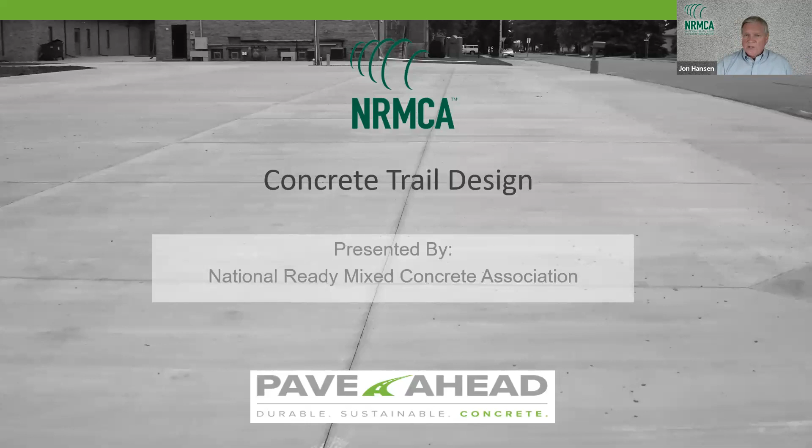As Jim mentioned, I cover parts of the southwestern United States now for our Pave Ahead team. I'm not working currently in the Midwest, even though I'm still living here. But I asked for and got the southwestern part of the United States and California a couple of years back because I was developing such good relationships through the years with contractors and producers in that area.

I looked at this today as I got it ready, and I thought, 48 years in the construction industry, my goodness. I'm almost ashamed to put that up there anymore, but as you can tell, that's a lifetime commitment to the concrete construction industry and construction in general.

16 of those years now have been with the National Ready Mix Concrete Association, on what was first the National Resource Directors team, and now we've divided it into paving and buildings, and I'm part of that paving team. I'm happy to tell you, just as an FYI, it was my idea to bring that Guide to Concrete Overlays of Asphalt Parking Lots to the industry.

This was a culmination of many conversations with another Illinoisan that you all know, Randy Riley, and sharing information back and forth on doing overlays of asphalt parking lots, along with Gordon Smith. These guys are really the pioneers in that. We brought that to market in 2012, and we're in the process of bringing out an updated version in September this year.

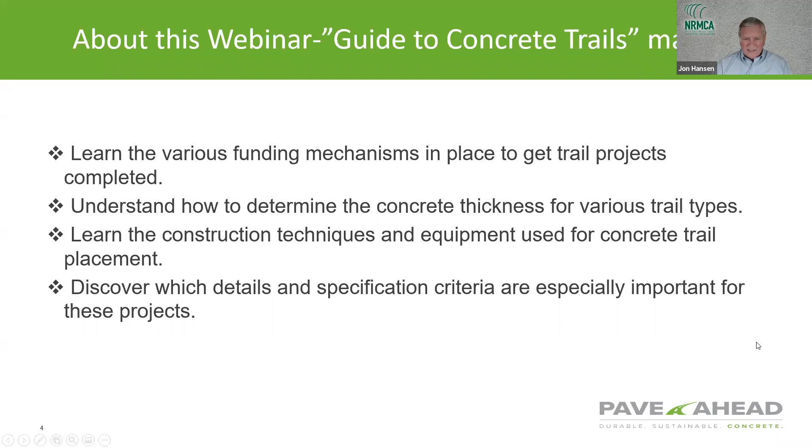And then we're going to look at which details and specification criteria are especially important for these projects. And when you get done with this, I hope you say like I do, boy, it's really quite simple. We don't try and complicate this. The design and the construction are really quite simple.

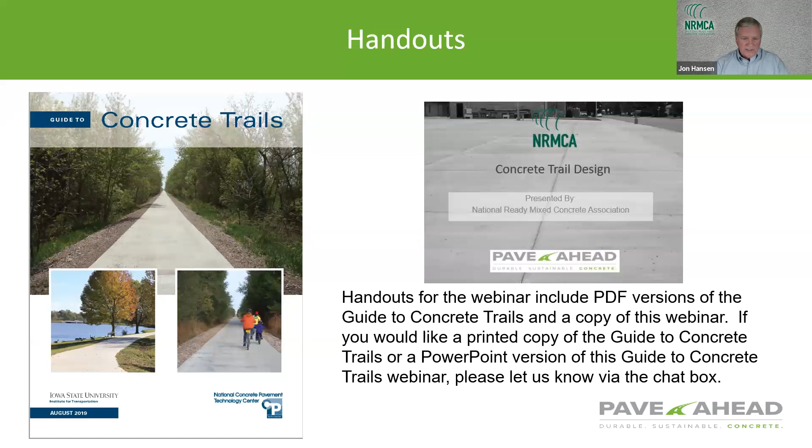And then, of course, if you've got some questions, type them into that chat box as we move forward. I do want to tell you that the Guide to Concrete Trails was produced by the National Concrete Pavement Technology Center. For those of you not familiar with the National CP Tech Center, it is a concrete paving research center based at Iowa State University.

I don't want you to get hung up on Iowa State University. I get people all over the country say, well, that's that Iowa document. No, that is the National Concrete Pavement Technology document. Much like the concrete industry has their National Research Center based at Iowa State University, which there were other universities in the running for when it was designated. I was part of the Iowa group that monitored that. The asphalt industry has their National Research Center at Auburn University. So we don't need to get hung up on it being a Midwest document. It is an industry document.

The reason we went to the CP Tech Center to write this document is that they are the recognized industry experts in all types of slab-on-grade paving. And of course, if you're going to have something written for the industry, why would you not go to the recognized resource? This was a collaborative effort.

The funding for this came from the Ready Mix Concrete Research and Education Foundation. So if any of you are here today and you contribute to the RMC Foundation, this is where your money's going. This is what it's being used to do.

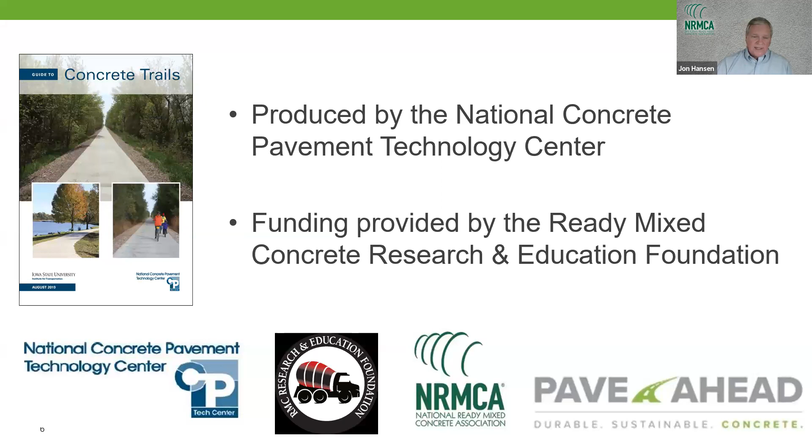And the goal of putting this together and bringing it to market was to deliver it at no cost. That is why you can download PDFs free, and why we sell the printed books at cost, at printing cost. This is not an effort to raise money selling books. It's an effort to bring information to the industry.

So why did we develop this Guide to Concrete Trails? Well, it comes down to this: we did some research and there was no standardized design and construction document that addressed concrete trail construction.

Now, we found three really good documents on asphalt trail construction, and they would put a sidebar in there, not specifically written by the asphalt industry but by other trail designers, saying concrete can be used for trail construction, talking about the thicknesses that had to be used, and they would mimic road design specifications and rebar. They were basically that same obstacle we run across all the time when someone else writes our information for us. They over design it.

And so we decided we needed an industry document that addressed the right practice of moving forward in building concrete hard surface recreational trails.

Now, what's happened in the last 20 to 30 years, and Jim mentioned the Des Moines area, it's assumed almost that when someone has a development, there will be an access trail of some kind within these developments. They have become a public utility that people expect within a community.

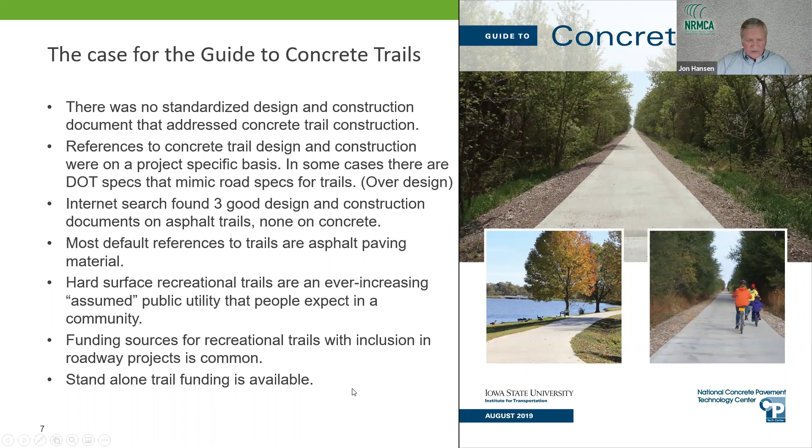You have to really decide what type of trail you're going to build and develop as you move forward. Right now, I'm in the process of working with a county that has 34 miles of developed trail. They are compacted limestone trails, and we're working on hard surfacing those, and of course we're talking about doing those in concrete. So we need to understand the terminology: recreational trails, hard surface recreational trails, concrete versus asphalt.

Let's just touch briefly on one slide here on funding that goes all the way back to 1956, the Federal Highway Act and the Highway Trust Fund, which had trails within that program. '68 National Trails, '76 the Rails to Trails grant program, we started to see the demise of some of the rural railroads. The Staggers Act, the ISTEA Act, '98, TEA-21, surface transportation block grants.

You need to explore all types of trail resources as you plan. And oftentimes, I'm going to touch on this in the next slide, trail ideas are moved forward by special interest groups within a community. We do find more designers, more engineers who are arbitrarily including them within their design packages, but a good grassroots effort of community activists really is one of your best ways to get trails done.

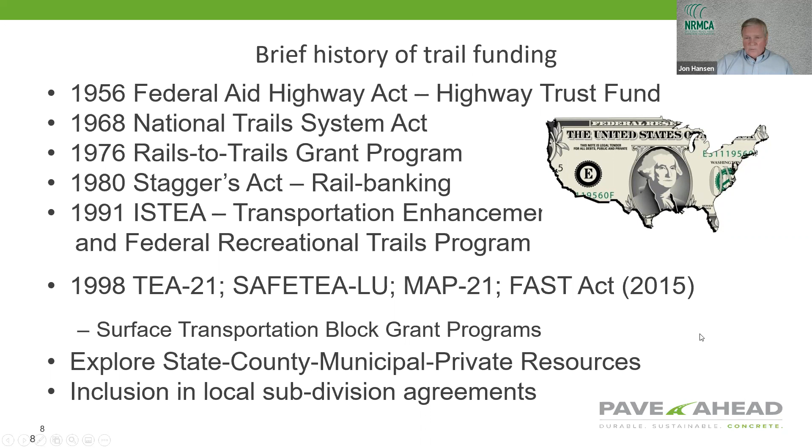So the trail guide talks a little bit about that, and it walks you through planning as an initial step, funding. Of course, there's always going to be an environmental impact review. There probably is going to be some land acquisition that has to take place. Then comes engineering, design and contract, construction, and then your final obligation is how do you maintain it.

Here is where, if you're taking a look at different paving materials and you look at concrete, on the maintenance side, the concrete will really shine because it's a long-term paving material that does not require some of the ongoing maintenance that other paving materials do require. But we put this in here because there is a systematic approach to developing trails, and we want you to be aware of that, that you don't hire engineering before you get your planning done of where the route will be for the trail. Follow these things in order to develop a successful trail program.

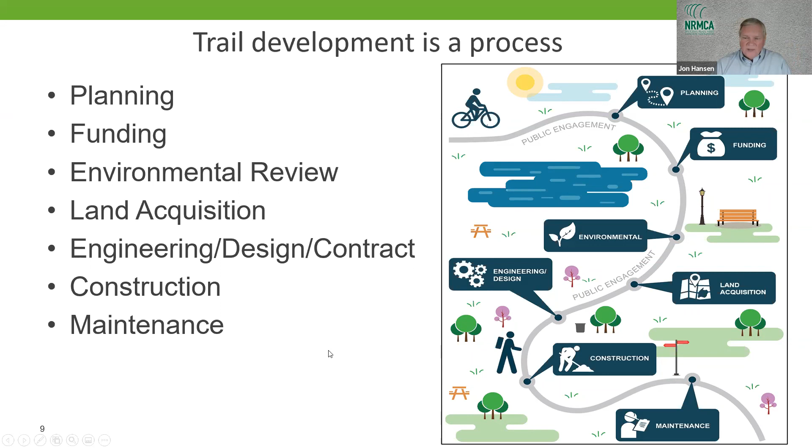Now, let's talk about definitions too. We want to break this down into 6 different trail types, so as we start to discuss trails, we have a good understanding of what type of trail pathway we're going to be looking at. So in the guide, we break this down, and if you look at the graphics here, we have 6 different trail conditions, and we give them names.

The rail trail is number 1, and of course that oftentimes goes on abandoned railroad bed and right of way. You've got your greenway trail, which will follow a park trail, maybe an existing park trail, or even go through wetlands. And you're going to see a case study towards the end of a trail system that incorporated even some pervious concrete because it went through a wetland area in Kentucky.

The circumferential trail, lake trail or pond trail, a very popular trail when people want to ride their bikes, push baby strollers, skateboard around a body of water, a lake or a pond. I think everyone is aware of a lot of lakes around their areas that may have developing trail systems. Maybe it's partially done, maybe it's planned. Not far from where I'm at, there's one being planned right now that's about half done, and they're looking at ways to complete the loop around the lake.

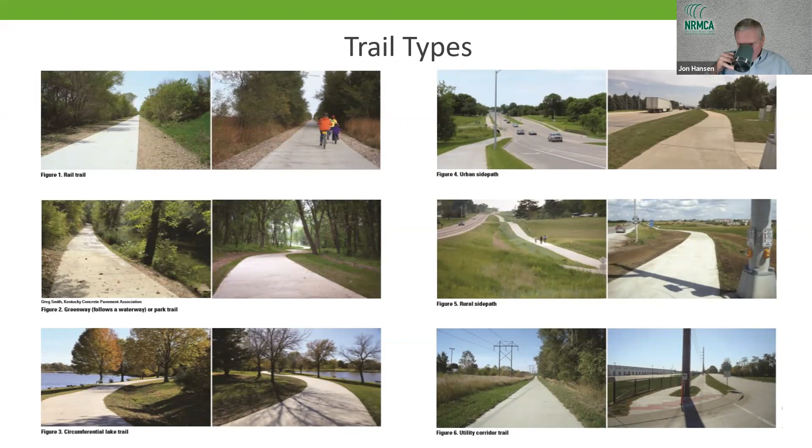So those are our six different trail types as we move forward.

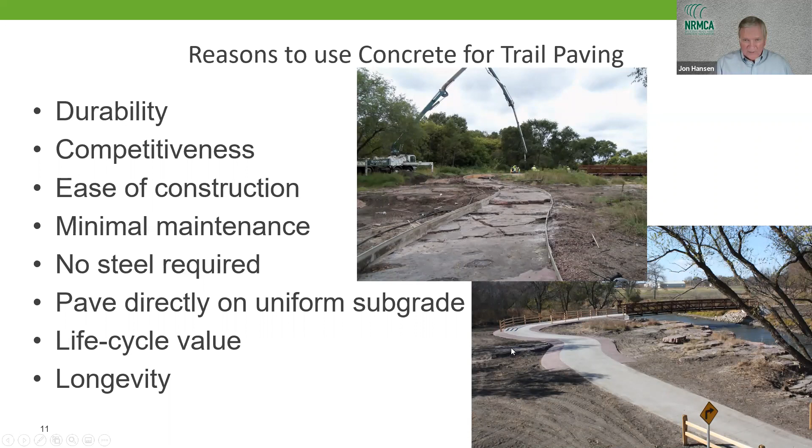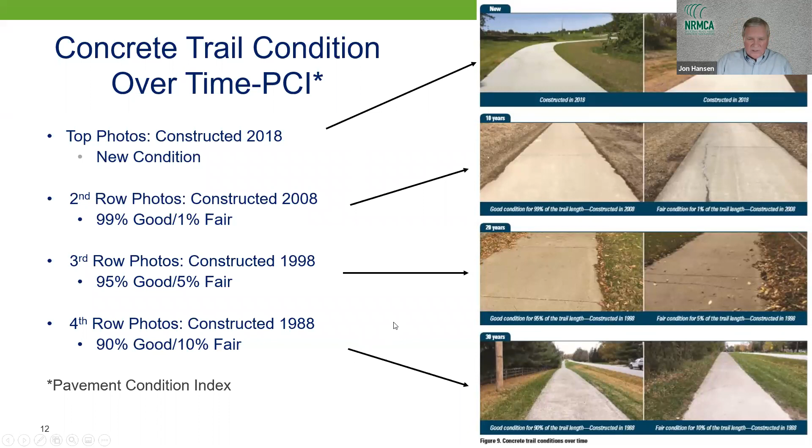We talk about what Matt Mihalevich is doing down in Fayetteville, Arkansas, as he is removing all of the asphalt trails he built in years past and replacing them with concrete trails.

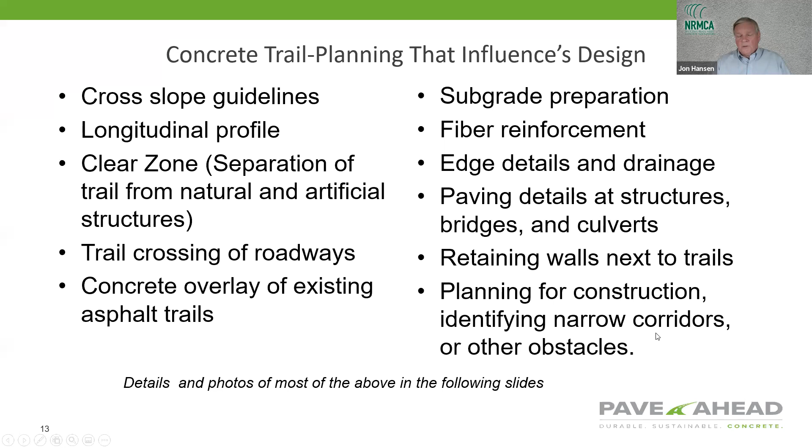We touch on subgrade preparation, where fiber reinforcement may be required, particularly on unsupported subgrade areas, edge details and drainage, paving details of structures, bridges, and culverts, retaining walls next to trails, and planning for construction, identifying narrow corridors or other obstacles. We put a lot of details and pictures in the guide to explain all those conditions.

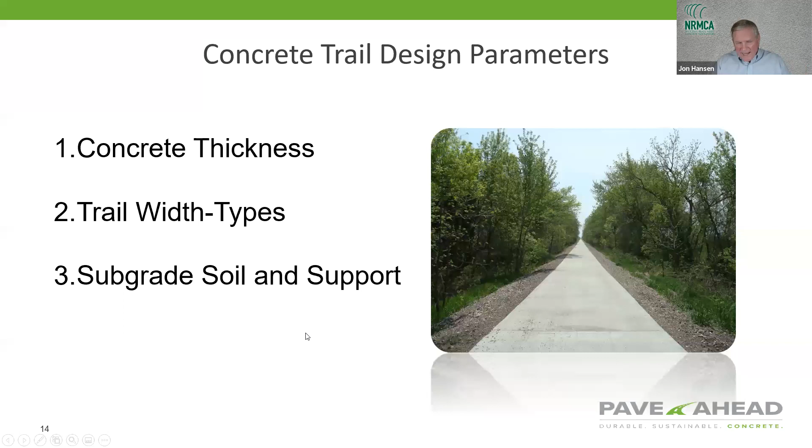I want to get into the trail design parameters. You're going to see how it's a very simple, straightforward methodology based on industry documentation on thickness, trail width, and subgrade soil support, and how we roll this into existing ACI documents to determine what these thicknesses should be.

When you get into a 14-foot trail, there's another construction consideration: oftentimes we'll need a longitudinal joint, and longitudinal joints, if we can avoid them in hard surface trails, is something we want to do.

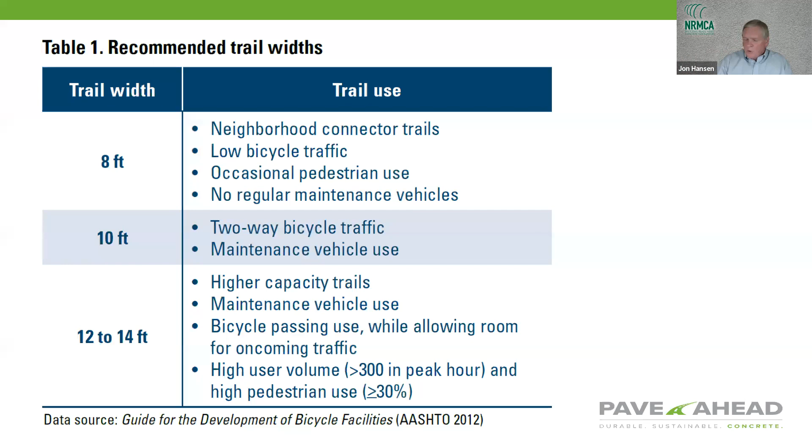In the 12 to 14-foot trails - and 12 is the most popular, 14 on rare occasions - they're a higher capacity trail. They allow for maintenance vehicles because there's a thicker design. They also allow for bicycle passing use, passing in the same lane while allowing room for oncoming traffic. They're a high volume trail, something like 300 in the peak hours, often frequented by places like a lake or a normal gathering place where people use the trail while they're there.

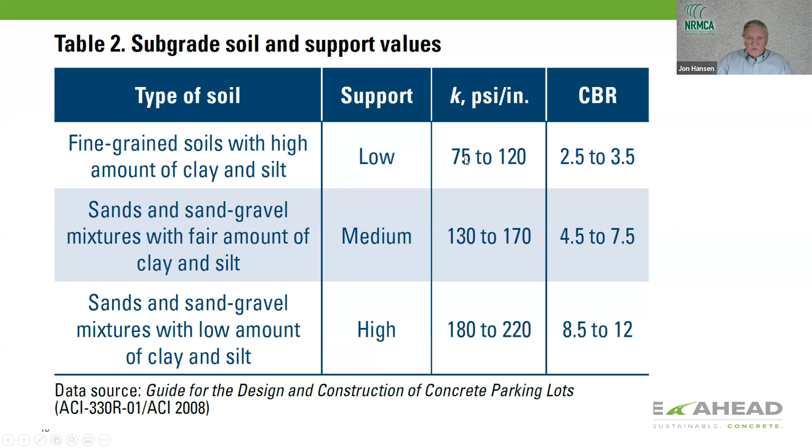We use this soil support value for determining the thickness of the trail, and many of you have seen this - it comes right out of ACI 330. We're looking at 3 different soil support levels: low, medium, and high, defined on the left-hand side using wording right out of ACI 330, with the comparative K value or CBR value associated with those types of soils.

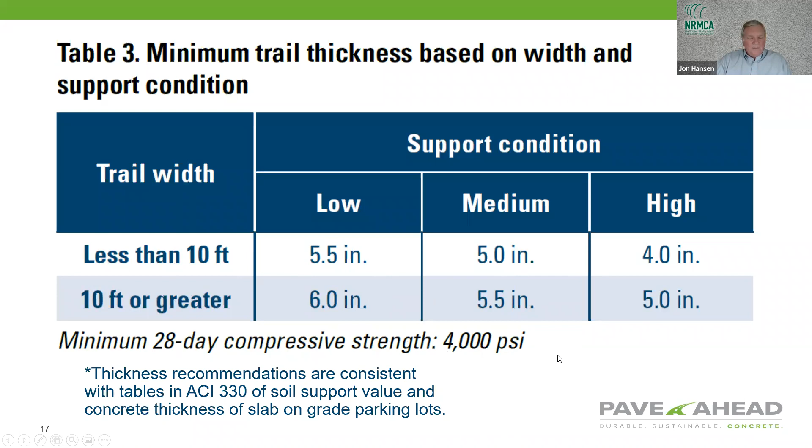Now look at this and start to crunch these numbers. An 8-foot wide trail with pretty decent soil is 4 inches thick. A 10-foot wide trail with pretty good soil support is 5 inches. And a 12-foot wide trail is 5 or 6 inches. So there's a correlation of width to thickness - half of 8 is 4, half of 10 is 5. It becomes a very straightforward methodology for understanding what potentially will be the thickness of the trail you're proposing.

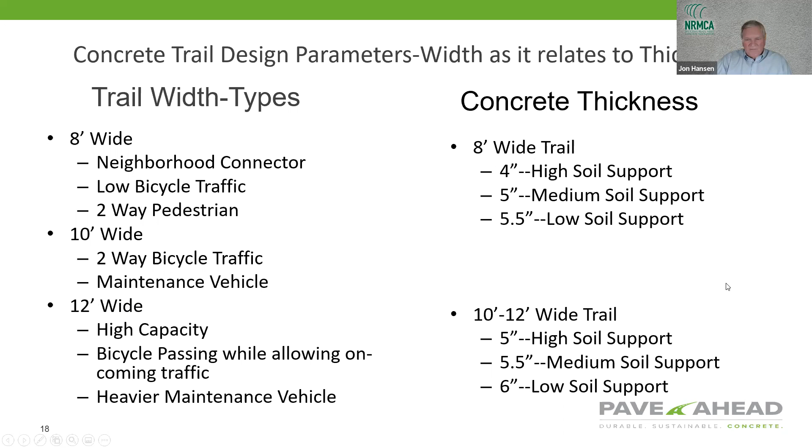I've captured that in one sheet. So as you download this, if you want to print this off one sheet, put the trail widths on the left-hand side, where they're used, and then the trail thicknesses, the concrete thicknesses on the right-hand side. This becomes what I call our trail thickness cheat sheet, a quick reference sheet you can print and have handy.

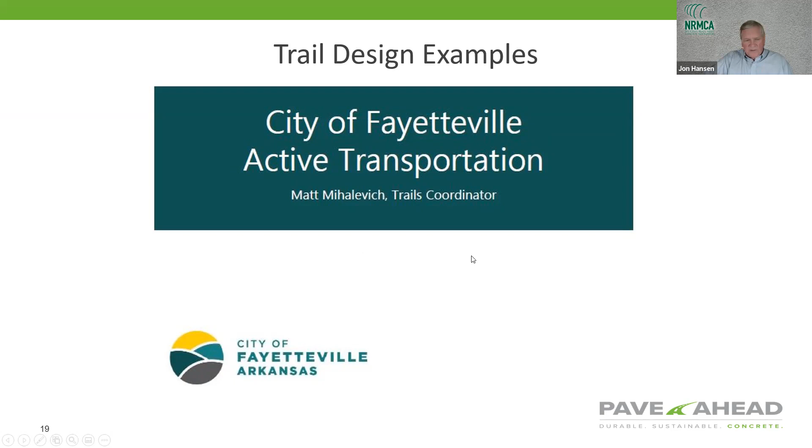Now let's move in to talk about what Matt Mihalevich has done down in Fayetteville, Arkansas. Fayetteville has a mature trail program, goes back to 2005. They do so much trail work down there that they have a trails coordinator within the Department of Transportation, and Matt is that guy. In Fayetteville, they have 46.5 miles of trails that are planned or under construction. They run the trail construction crew with 9 members of city staff within the transportation division, dedicated to building just trails.

Every photo I show you is going to be of building concrete trails, because you are encouraged to call Matt if you'd like, and he will tell you that they are taking out their asphalt trails built back in 2005 - so they're 15 years old - and replacing them with concrete. As he put it to me, maintenance on the asphalt trails was just killing their budgets for building new trails. If we build them once in concrete, we're done with them for at least 20 years. We don't have to go back and dedicate any maintenance to them.

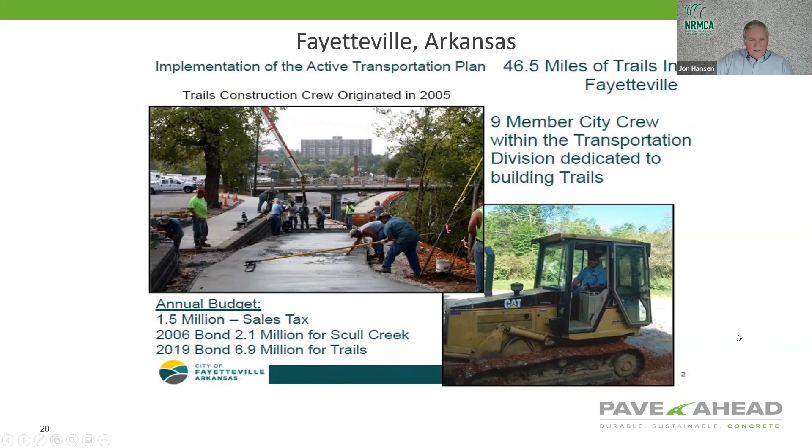They get $1.5 million in sales tax revenue per year. In 2006 and 2019, they did bond issues because they had some trails that included structures and underpasses, and a longer trail system of 6.9 million for trails in 2019.

But Matt moves forward with a plan, and I just want to give you some examples of how you plan and lay out your trail system. That's here in just a couple of sheets.

Now I bring that to your attention for those who say we're going to have an obstacle getting a trail here. I'll tell you, from a mature trail metropolitan area, if you have a home in Des Moines, Iowa, or Ankeny, or Altoona, or Pleasant Hill, or Waukee, or anything surrounding, and it backs up to a trail, your house will bring a premium. Because, as we go back to earlier in the slides, people are expecting that type of utility enhancement when they move into a community.

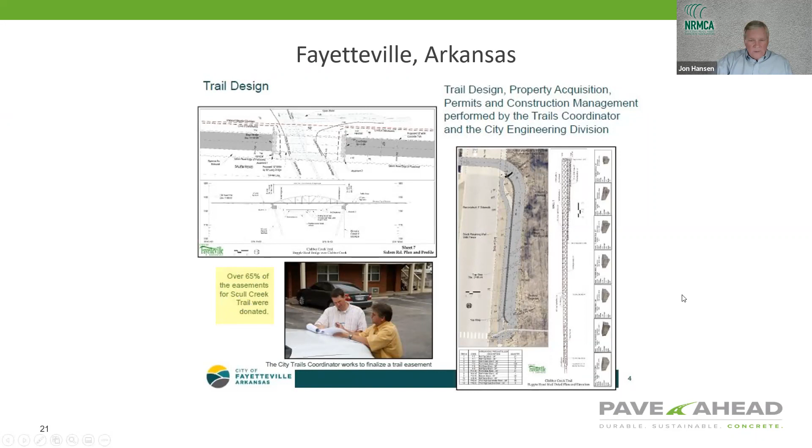So when you hear the reasons why you can't put a trail somewhere, understand that once the trail system is in progress, people start to see the advantage of it. I hope you will see what Matt saw down there in Fayetteville, that over 65% of the easements didn't have to be bought - they were donated. People said, we want that trail on our property.

He moves forward with a good set of plans that they developed through the transportation department. These would be typical of what you would design. They use 3,500 PSI concrete in Fayetteville, which is a very reasonable concrete for that part of the country. They don't have some of the freeze-thaw issues that we would have up further north here.

But what I like about his plans is he lays out and tells you what is a good cross slope on the trail for good drainage. He talks about what finish they expect to do - it's a medium broom finish. That comes from years of feedback from people pushing baby strollers, riding bicycles, jogging, or skating, favoring that broom non-slip finish.

Also, all these trails are designed with just transverse control joints cut into them. There are no longitudinal cracks or longitudinal joints. I'm going to show you at the end here what can happen if you have longitudinal joints in a trail, and the maintenance that may be involved.

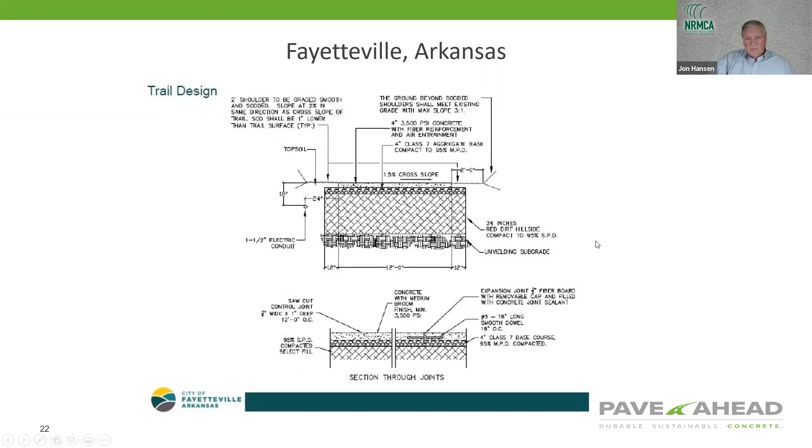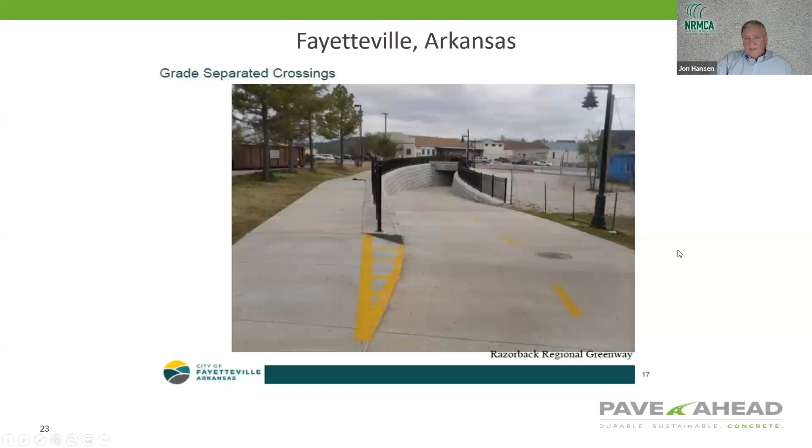They've taken great pains to do grade separation and crossings going underneath bridges. These are some of the trails they built that needed bond issues because they were more than what the $1.5 million in tax funding would do every year. But they have a very mature trail system now, all done in concrete down there in Fayetteville, Arkansas.

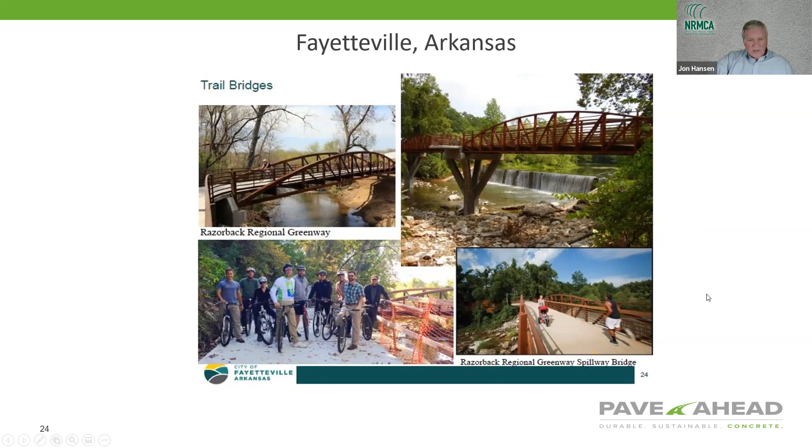I'd encourage you, if you want to talk to Matt, give him a call, tell him that we met via webinar. I had Matt featured on one of the national webinars a year ago, and he spoke to a national audience about their concrete trail development in Fayetteville, Arkansas.

Also, you may see DOT types of funding come out with the plans and specifications. We have a mature trail program within the state of Iowa.

I think you do in Illinois also. The DOT has plans and specifications right within their specs for roadways. I think what you're seeing across the upper Midwest in different places is that when roadways are developed or improved, there's a provision for trails to be built alongside those roadways. They just blend them right into that same package. That's a pretty easy and simple way to get a trail system built when you incorporate it within an existing project or trail roadway project.

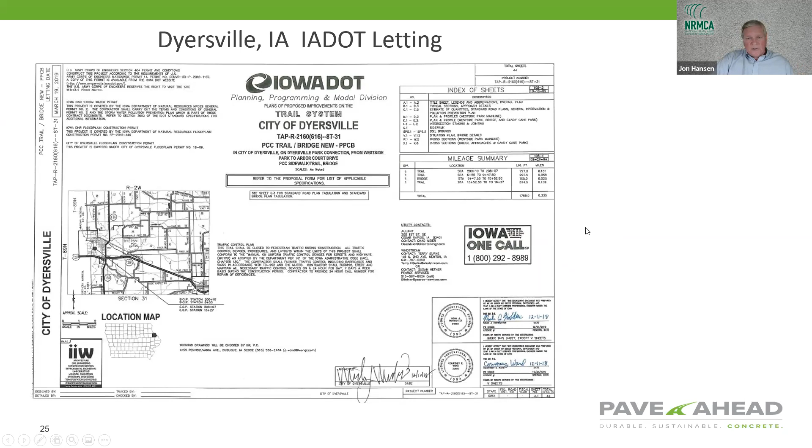This one again, in Dyersville, is a multi-phased project, but they lay it all out. Everybody gets a good idea of where the trail is going to go, where it'll terminate, what the challenges are, where bridges will be built. Communicating this to the public as you move your trail program forward is essential. Get public buy-in on these as you plan your trail program.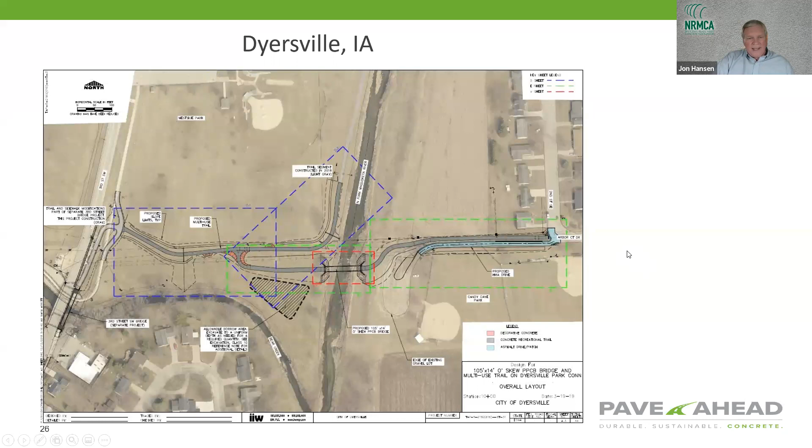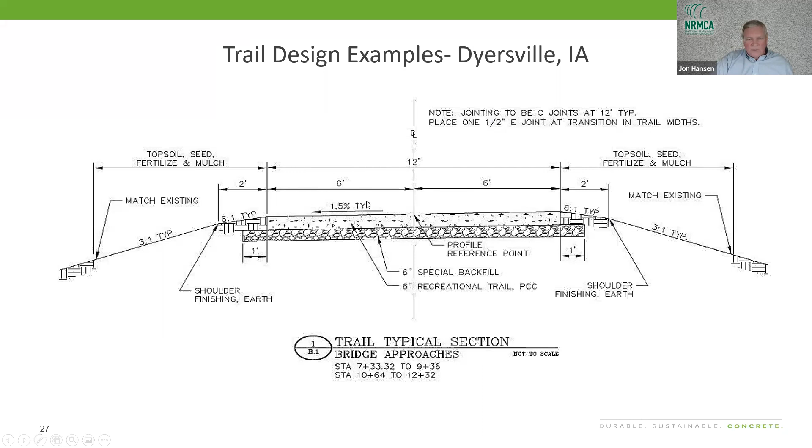What I want to show you quickly here is some pretty typical cross sections on this trail and how they relate back to even what's in that guide. If we look at the width of this trail, this is a 12-foot wide trail. If you look down here, we have 6 inches of paving specified. So that falls into that 12-foot wide trail, 6 inches of paving. This would be maybe a fill site, and they're showing the slope away from the trail. And of course, we see once again this 1.5% cross slope in the trail section.

If we had parts of this trail that are in cut sections, the details may look like this, but a lot of the specifications remain the same. We show the slopes away from the trail and the shallow ditches that are created, which are good design practice to come off the trail in cut sections to provide drainage, but not too deep of a ditch where it would cause a hazard if someone ran off the trail with a bicycle, a baby carriage, whatever it may be. Good details.

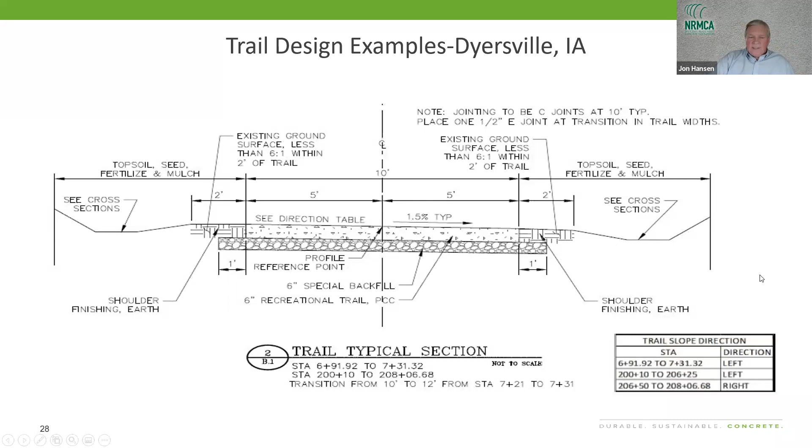I have my phone on do not disturb and it's still ringing. Wow, I don't know what happened.

If you look at the slide we have up there now, we show a cross section. This is not a very good one, it'll come through better on a printout of the slides, but we have a trail section along with a roadway section, or it could be a parking section, and then drainage away. So once again, just some examples of trail section slides.

Let's move into construction and talk about different ways trails are constructed. And I want to point you out to...

I can't cut you off for some reason. I'm on a webinar right now. Oh, Jerry, yeah, you need to hang up, I need to call you back. Thanks, now I got him cut off. I'm sorry about that.

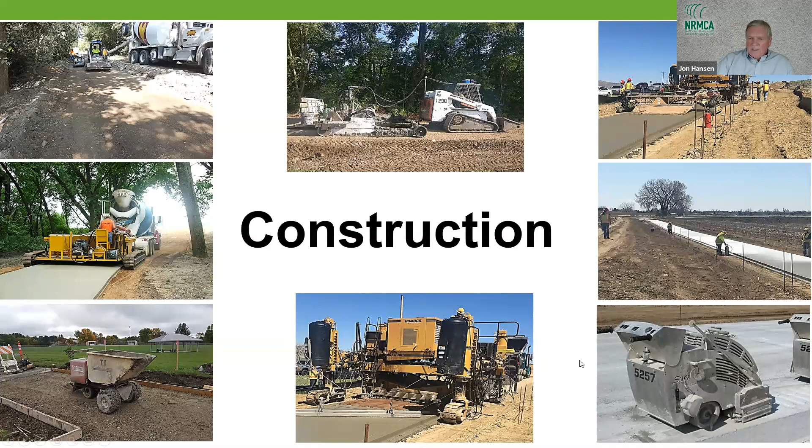Here are some of the things the guide covers in construction: concrete mixes, delivery systems, whether it's fixed form paving, slip form paving, or other specialized types like box pavers and dedicated trail pavers.

Equipment paths need to be defined during paving if we need to get equipment to the trail that isn't driven on the trail itself. All these things need to be talked about. The most common finish is once it's placed, you give it maybe a bull float if you need to level something out, then a surface broom or burlap drag.

Smoothness is talked about in terms of what is determined to be correct for aesthetics, walking rideability, and good traction on the trail. Curing is discussed, along with construction and isolation joints and where to use them, and if you elect to use joint sealant—though most trail systems do not have sealed joints because they're cut with early entry saws.

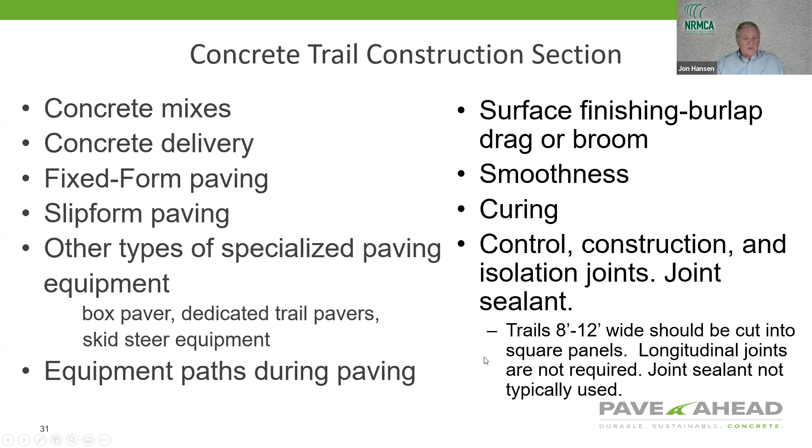Then there's that problematic longitudinal crack, if it should occur. That's only going to happen if you go beyond 12 feet, because we've designed these panels to be cut into square panels.

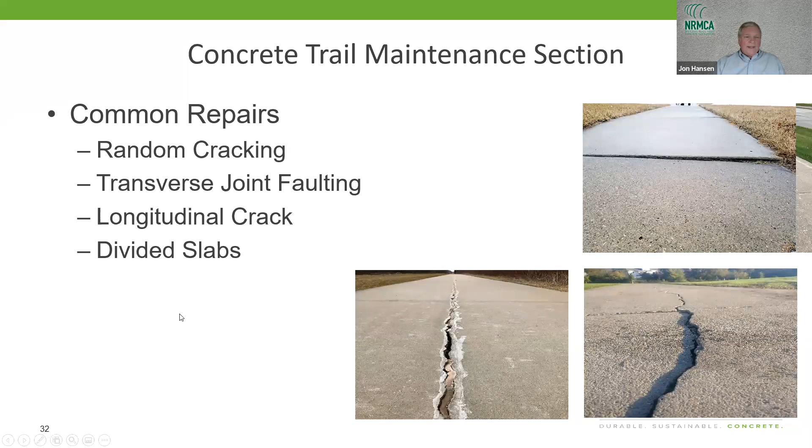So a 12-foot wide trail will be cut into 12 by 12 panels, 10s into 10 by 10, 8s into 8 by 8s. And there are other types of repairs that can happen down the road.

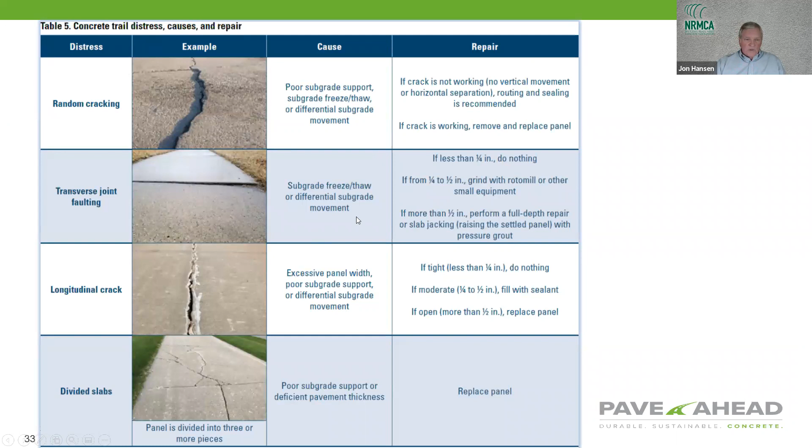Then we talk about distress levels and repairs. We cover these in more detail with more pictures and give you the repair option that should be done. We also have a section covering concrete overlay on asphalt trails.

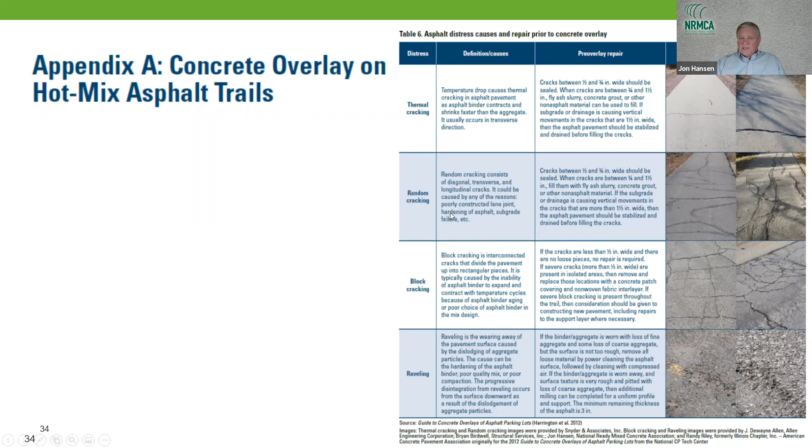This has been done successfully on a number of projects. We look at the evaluation of the existing asphalt condition and the path forward to an overlay on that section. Now I want to wrap this up with some case studies—just 4 case studies.

They're all kind of different. They all accomplish different things. They were all done a little differently. So let's jump into this and look at the Dam West subdivision in Aurora, Colorado.

In the early days, in 1991, this is really what we'd call today just a big sidewalk, but in '91 it was called a trail. That was before we evolved this into saying no, trails are bigger than 6 foot—they need to be 8 foot wide to call it a trail. So we have a trail here that's about 5 foot wide.

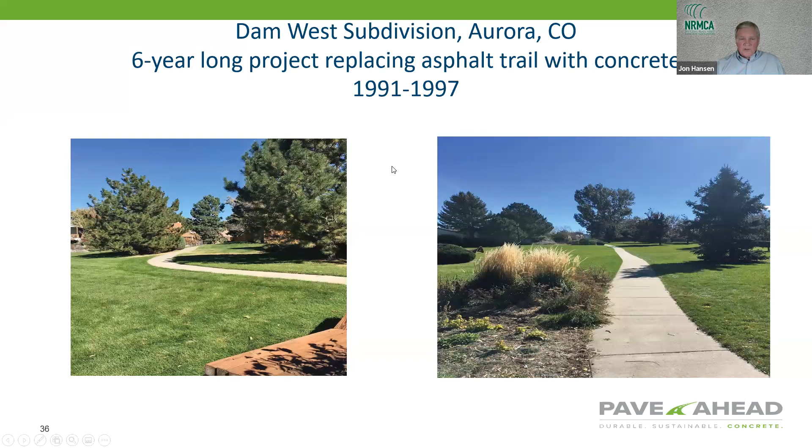It took a few years to replace the asphalt trail with concrete. They took it all out and did a replacement in this subdivision back in '97 with concrete. Let's jump forward and look at the evolution of this.

It's the Sauk River Trail in Swan Lake, Iowa. They did a pickup and recycling of the asphalt and used it as base before they put down the concrete trail. So they had the asphalt trail there, it deteriorated. Rather than overlay it—since overlays of asphalt trails weren't as well known at that time—they picked it up and reused that asphalt as base for the concrete.

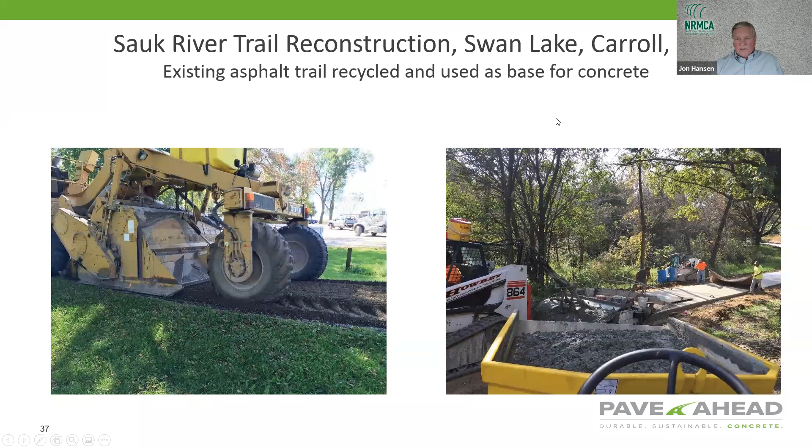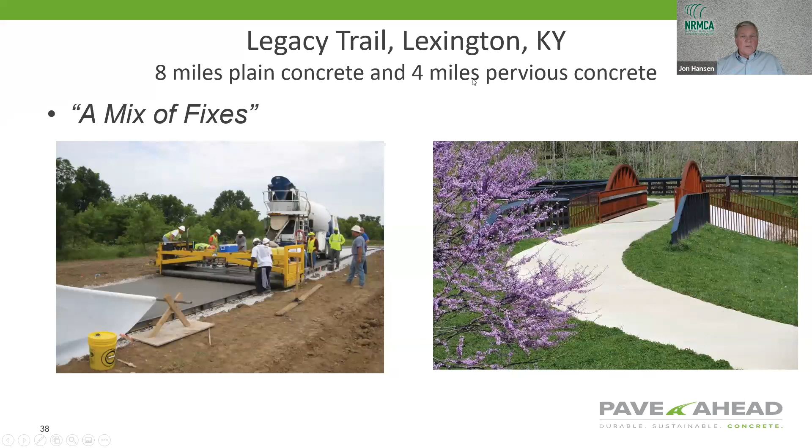The Legacy Trail in Lexington, Kentucky is 8 miles of plain concrete and 4 miles of pervious concrete. As we visited with the person who headed this up, he said we needed a mix of fixes—we couldn't just arbitrarily use one type of trail construction because 4 miles went through a wetland area, and we needed something that would allow water to drain through. So we used a combination of both plain concrete and pervious concrete in this particular trail.

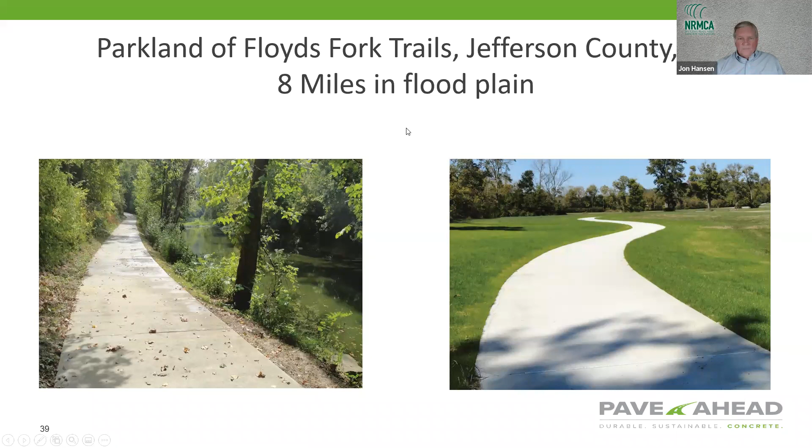And then we have the Parkland of Floyds Fork Trails, Jefferson County. That's 8 miles of conventional concrete trail in a floodplain. Now, floodplain is different than an area that floods a lot like the pervious section did in the previous case study, but it was a high potential for flooding. And of course, water is the worst enemy of asphalt, so they used concrete in this floodplain without any problem. When it does occasionally flood, water runs up on the concrete, runs off, and it remains in good shape.

Now, there are additional case studies that I would point you to, and we have a website called concretetracker.org. If you'd like to pull into concretetracker.org, you can search trails and look at different case studies of trails there.

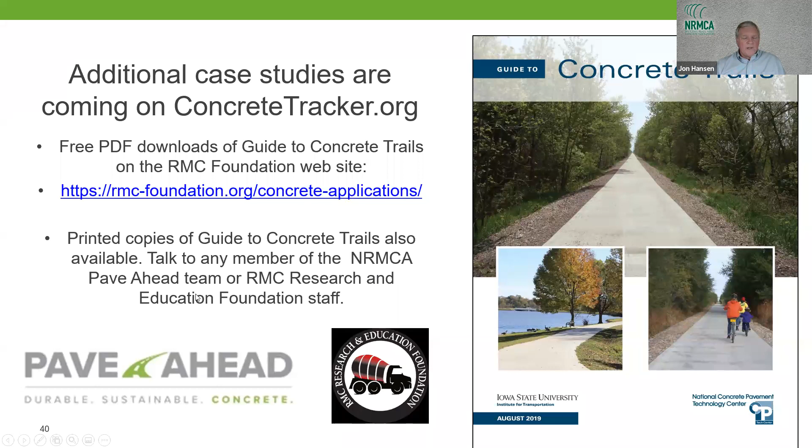If you would like to go direct and get a download copy of the Guide to Concrete Trails, you can go to the rmc-foundation.org concrete applications section of their website, and there are a number of different download options. If you want a very high quality copy that can be used for printing, you can do that. If you want just a copy to read, you can pick that option. And as I mentioned, printed copies of the guide are also available. Just talk to Jim, and we'll make sure you get printed copies if you'd like to have one.

I want to just end this with another website called paveahead.com. It's a concrete pavement design center. If you have any concrete project, be it mainline paving, overlay, streets and local roads, or trails, you can get assistance. This is the newest design software program that's out there on the market today. It's the most concise.

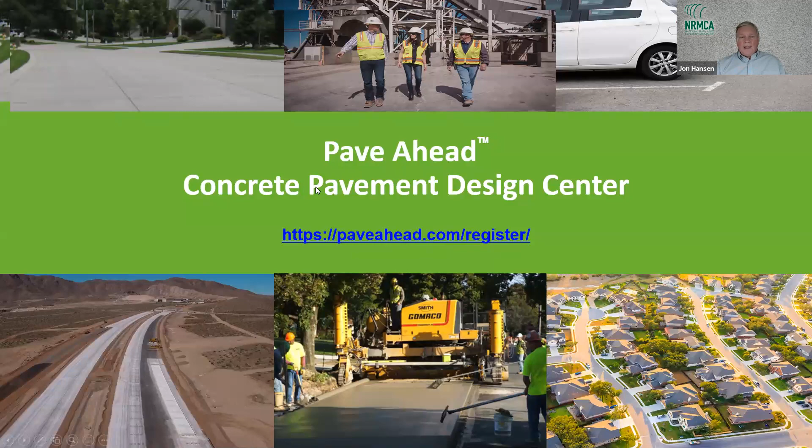And I say correct, and I'll say this, if you read Concrete in Focus, we are going to have an article coming out next month about those who are using outdated design programs for their concrete designs, and we point them to the Concrete Pavement Design Center and encourage them to go there. Because, as Jim will tell you, with being in this business as long as we've both been, material changes, our knowledge base changes, and this is the most up-to-date design center you can find for any type of slab on grade paving design. It's at paveahead.com, the Concrete Pavement Design Center.

So Jim, I'm done with what I was going to do here, and we're ready for some questions if you are.